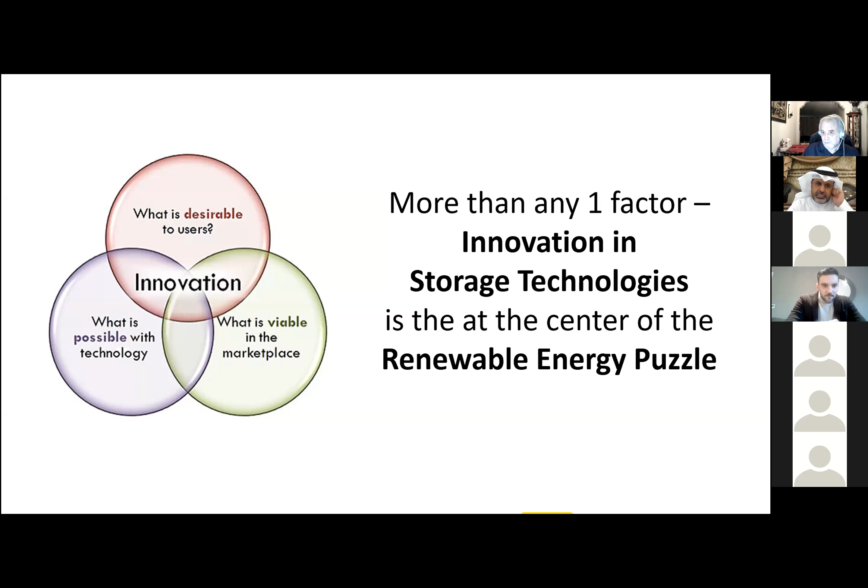First, in innovation, more than any other factor, innovation in storage technology is at the center of the renewable energy puzzle. Innovation is about what is desirable, what is possible, and what is viable. And that is the Venn diagram for innovation.

Creating energy in the renewable energy field is already a reality. Creating the amounts needed in most places with most technologies is already accepted. But holding on to that power using realistic technologies until it is actually needed is the major problem where innovation is needed today.

There are 5 basic conventional energy storage technologies. Just to quickly review: electrochemical, which includes all types of batteries; electromechanical, which includes flywheels, pumped hydro, compressed air; chemical, electrical, and thermal.

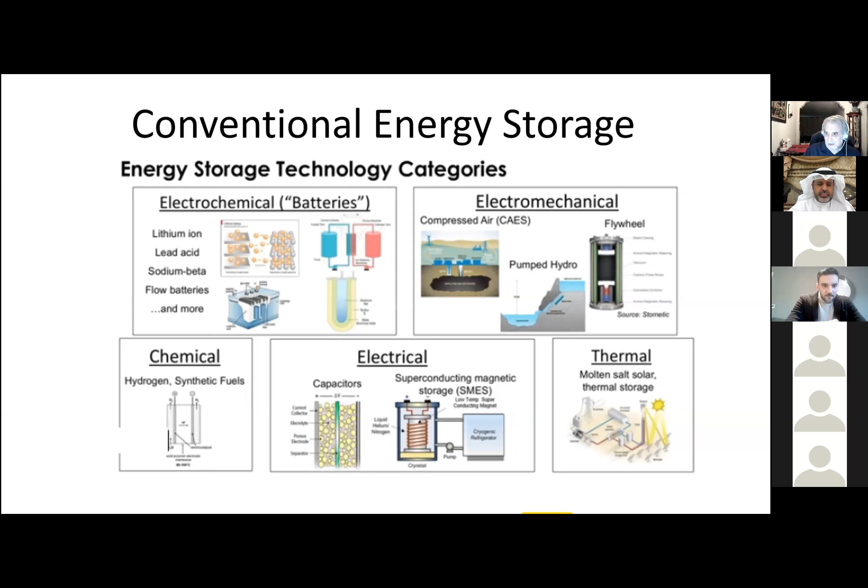What we have in the way of concerns for all of these are the price, the cost of installing it, the maintenance involved, the production of the actual equipment, the energy output and what you can actually store, the capacity, the life cycle of the equipment, how much it's going to take to replace it in what sort of regular time frame, where you locate the equipment, and the environmental impact.

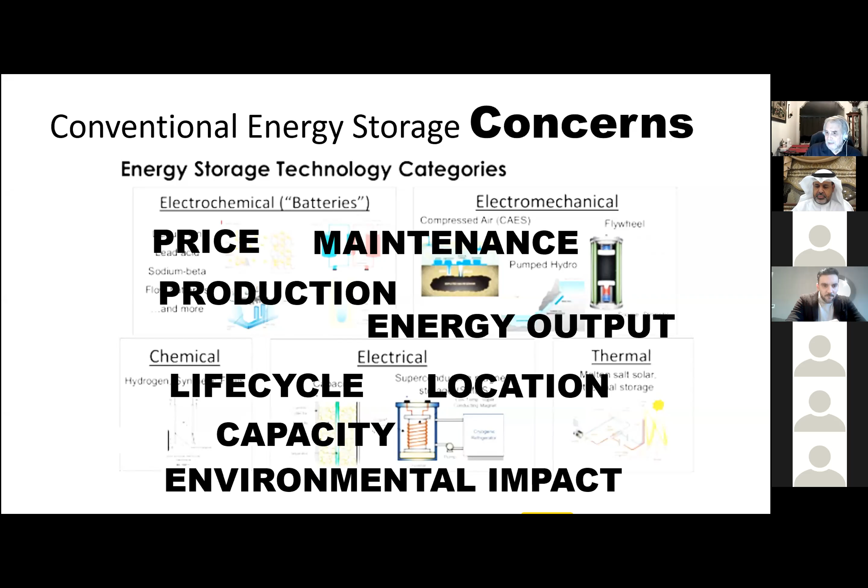Even with serious shortcomings, there are many accepted energy storage systems active in the marketplace today.

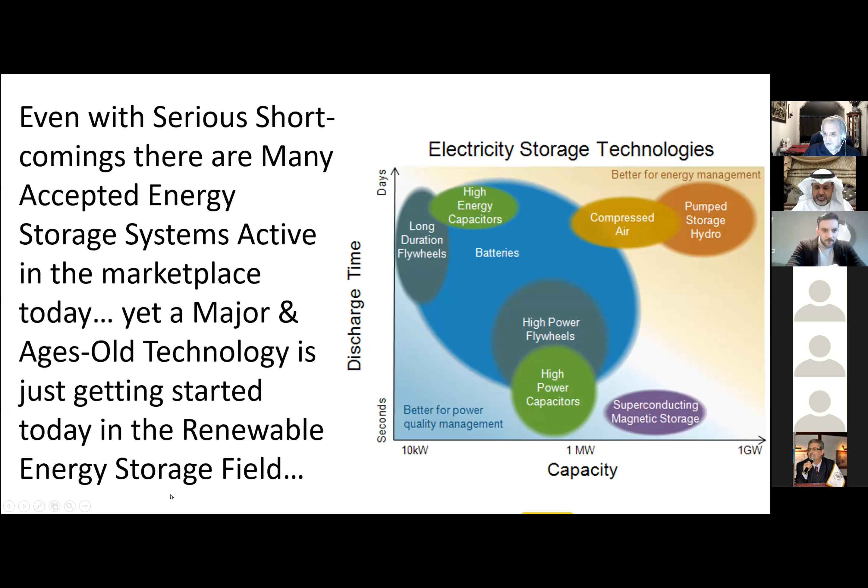Yes, thank you. There are many active in the marketplace today, yet a major age-old technology is just getting started in the renewable energy field. That old school storage technology is weight and gravity-based systems called KESS.

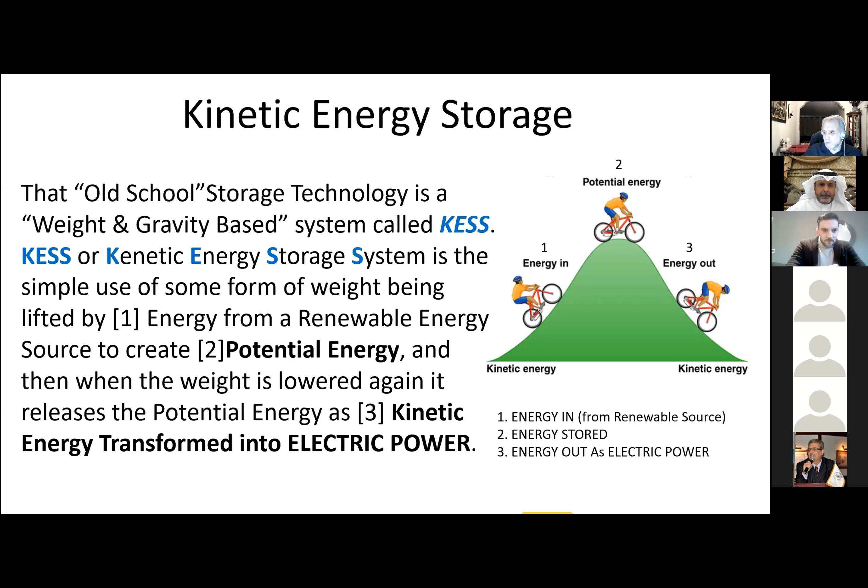KESS, or kinetic energy storage system, is the simple use of some sort of weight being lifted, as shown in number 1, the bike riding up the hill, energy from a renewable energy source creating the energy to get it up there. Second, potential energy, storing that at a height, and then when the weight is lowered again, as in rolling down the hill, it releases potential energy as kinetic energy, transformed into electric power.

All hydroelectric dams are a form of kinetic energy storage and release system. Pumped hydro is the most common use of kinetic energy storage and release. Renewable energy is used to pump water up from the lower reservoir to the upper reservoir, and this is usually done at a time of day when you have the best price to get that power to use it to pump up. The flow downward creates the electric power.

Systems like this use 85 to 95% of the power to recycle itself. So you get a 5 to 15% net power storage to power generation efficiency. And this is very common.

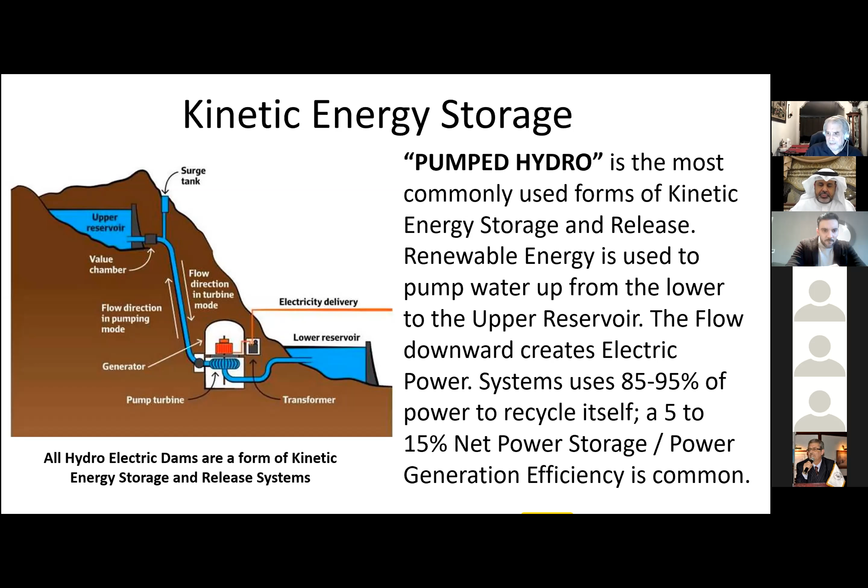Well, what has been known for many years and used in many things outside of renewable energy is that you can use a motor to lift a weight by electric power. That's number one here. The electric power is going in, and that creates potential energy in the weight by lifting it up. The weight stores that energy as long as it's held, which is shown in number 2.

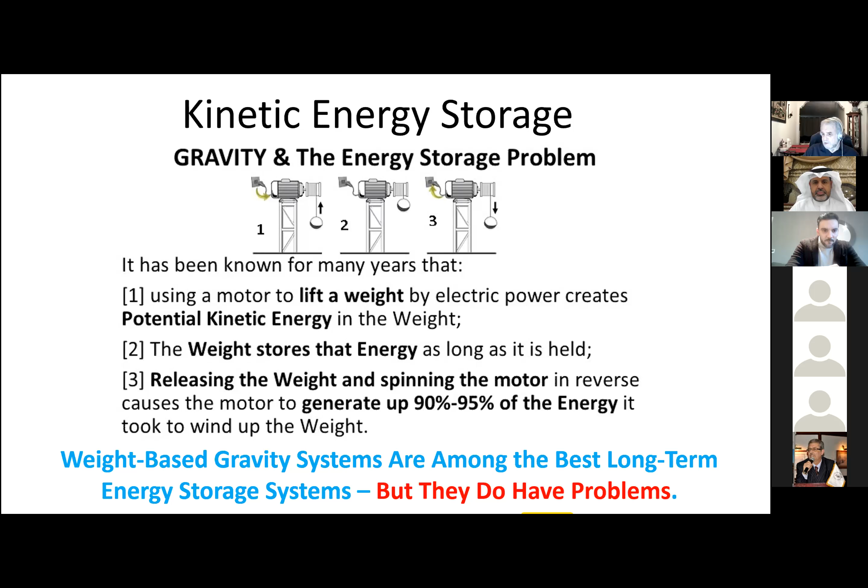And then in number 3, releasing the weight and spinning the motor in reverse causes the motor to become a generator, to generate up to 90 to 95% of the energy it took to wind up the weight. This is very efficient. Weight-based gravity systems are among the best long-term energy storage systems, but like everything, they do have problems.

What I want to talk about here to begin with are 4 new technologies that are coming to the marketplace for gravity weight-based renewable energy storage systems. These 4 technologies are not quite on the market yet, but have been approved for funding and have been in negotiations for large-scale purchases, but very few comments have come out about the downsides of these technologies.

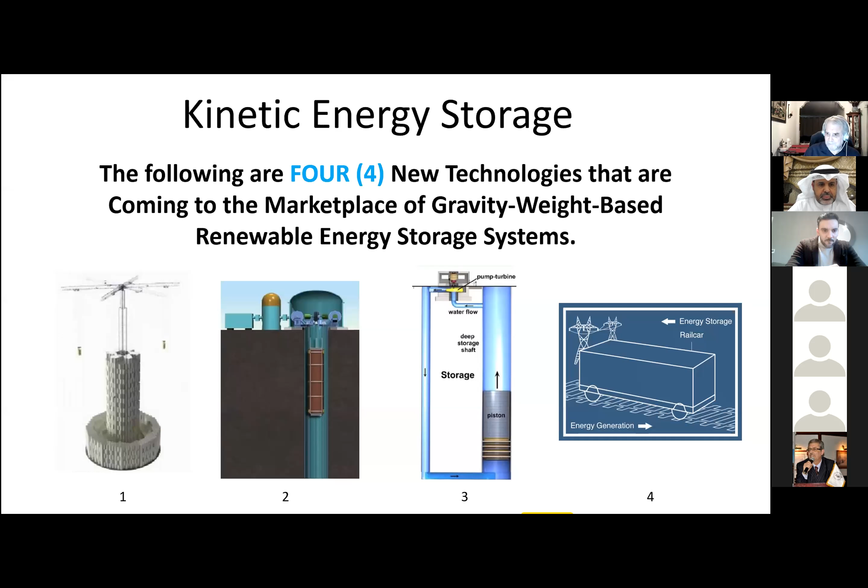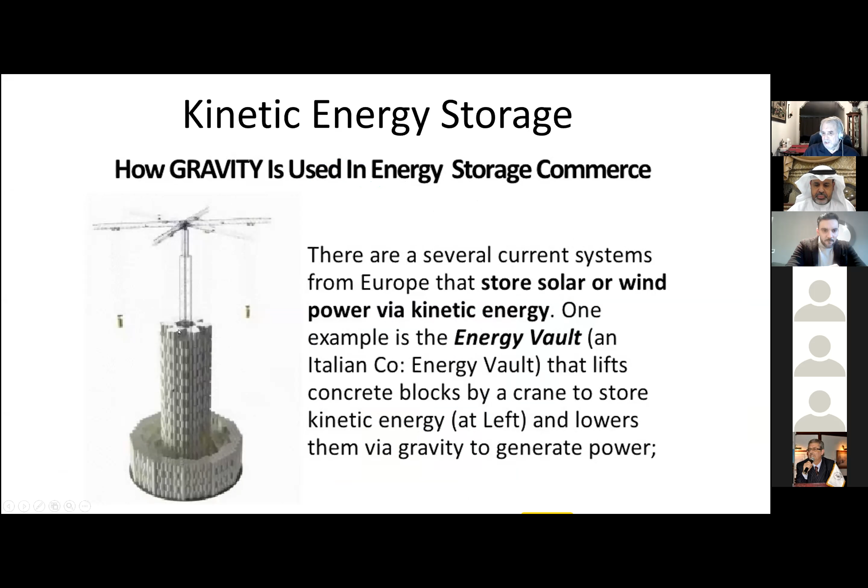First, let's talk about the energy vault. This is one of several to come out of Europe, and this one is very simple in that it uses cranes. As you can see, there are 6 cranes here to lift up concrete blocks to store the kinetic energy in these blocks as they're stacked up around the crane. Here's the system with 4 cranes, and actually you've got a 5th one on top. Minimal charge, half of the charge is up, 3/4, and full storage.

Let's go back a second. This actually is a system that has good potential. You can output power as other power is stored in, and you can store power for long periods of time.

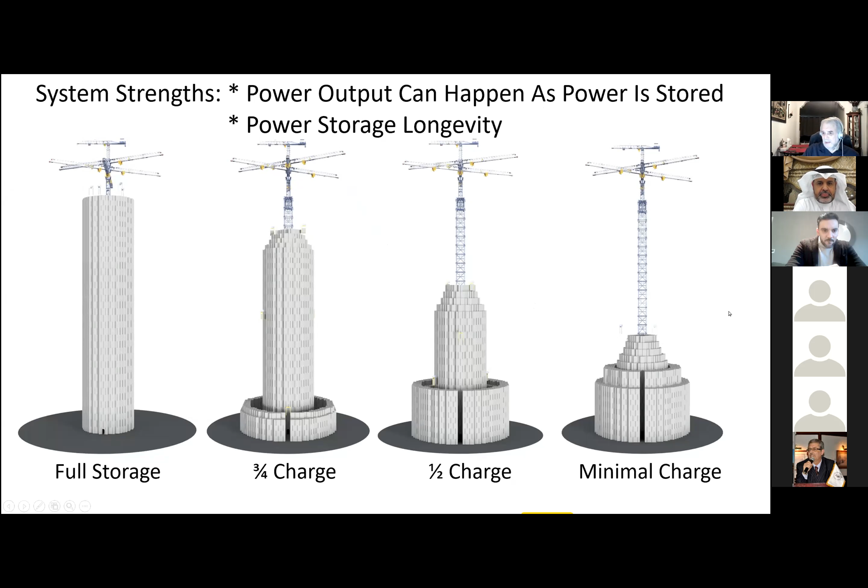But this storage system has problems. Possible collapse from misalignment of the blocks. High winds can affect the swing of the cables during power generation or movement of the blocks to or from storage. Earthquakes or earth shifts can topple the structure. The number of crane arms limits the power production or storage at any given time, as well as the actual weight of each concrete block. You need to have a massive weight in one location, and you'd have to have either a major foundation built or an area where you place this on a bedrock base. And my favorite, it's a massive eyesore on any landscape. This would have to be much, much larger than a wind farm, and it would be something that people really wouldn't be happy to look at long term.

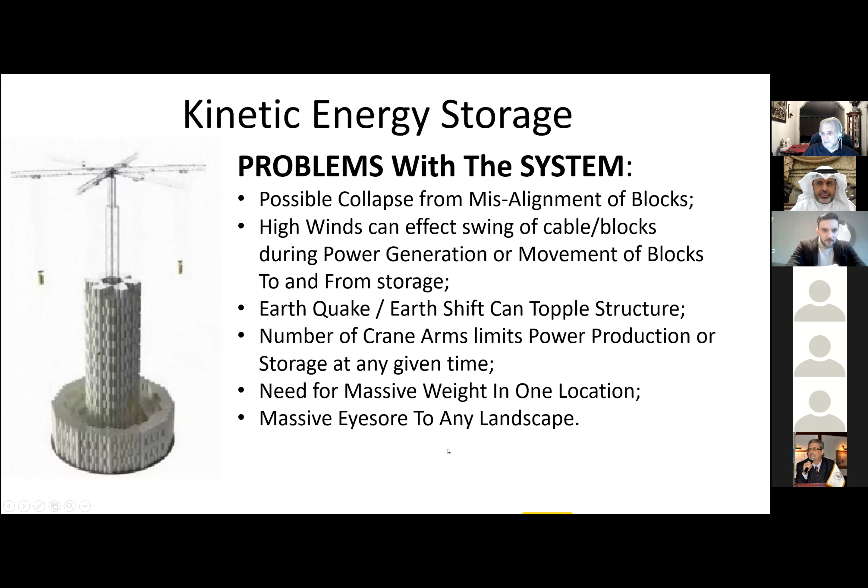The second energy system is called gravitricity, and this is a Swiss company. What they've done is dig a very deep hole, and in that hole they put a weight, connected on 4 sides with cables to combination motor generators. When the weight is at the bottom of the hole, they use power from renewable energy to pull it up and place it at the top, storing the kinetic energy in the weight. When they want power back, they release the weight slowly, turning these 4 generators, the pulleys, as generators, producing electric power and outputting it to the grid as needed.

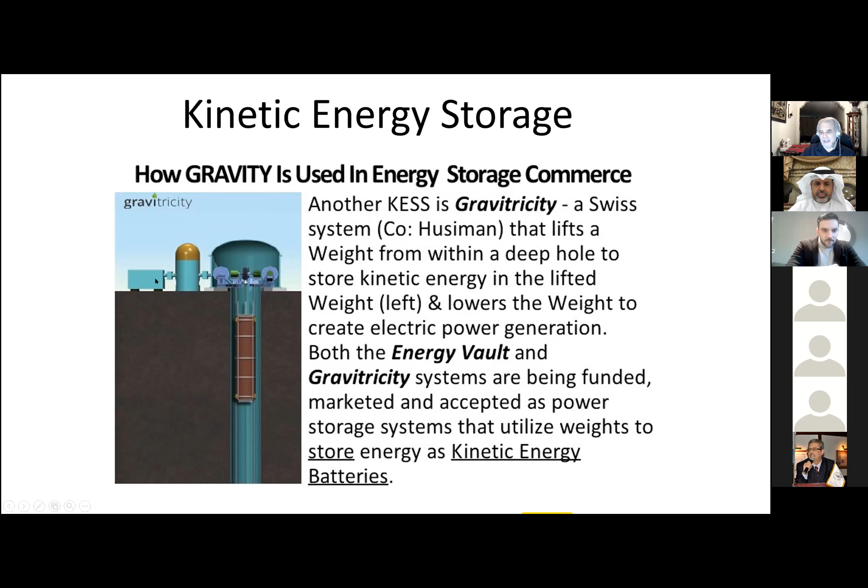All of this is pretty good, but there are problems with this system. Earthquakes and ground shifts, again, can totally destroy this system very quickly. Multiple cable sets and generator motors mean that the failure of one is the failure of the entire system. There's no power in and power out simultaneous capability—you either put power in or take power out. You have limited static output per system, although they can be linked together. And if one of the cable sets snaps or snags, you're going to get a weight shift and possible tilting and jamming of the weight in the shaft. The stability of this long tube, which they say could be hundreds of meters deep, is in jeopardy.

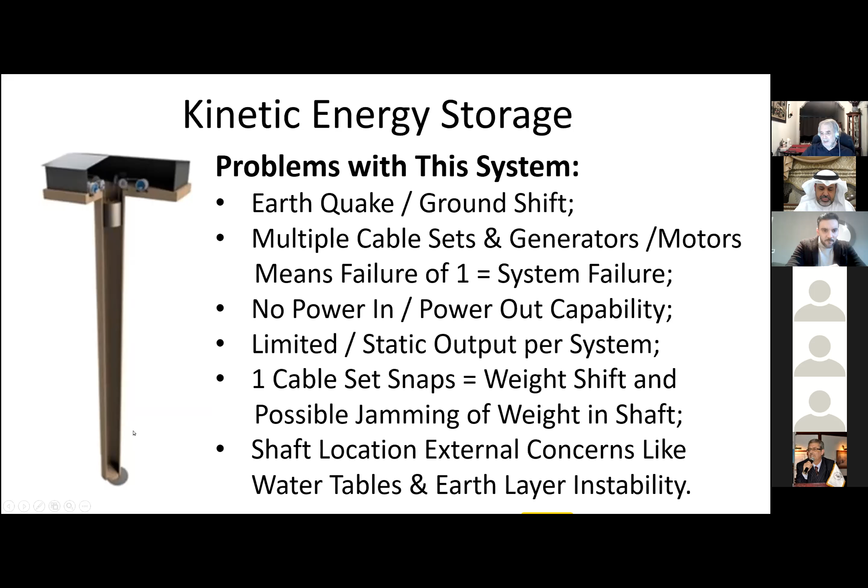A third kinetic energy storage system is called gravity power. It utilizes what's basically a captive pump hydro type system. In operation, a single large piston, shown here on the right, is pushed upwards in a tube via a motorized turbine that uses pressurized water placed under the piston. Let me go to the next one. Here, it pumps water from the top down under the piston, pushing the piston up.

When the piston is at its maximum or any point in between, they can reverse the flow. The piston goes down and the water is pumped up through the turbine, spinning the generator, creating electricity.

They're only estimating a 75 to 80% efficiency in this. They say it's a low-cost system, but I have my doubts about that. No emissions is true, as are the other systems. No continued water use—we'll talk about that in a second. And it should have excellent dynamic response, but it hasn't been tried out yet. They're still working on the prototype.

As you can see by the size of the people here, this is quite a large endeavor. Digging this hole, making the shaft, whether that's a steel or concrete inner liner, it's going to be a long process to get this done. And it only has the operating capability of a very specific amount of power at any one time.

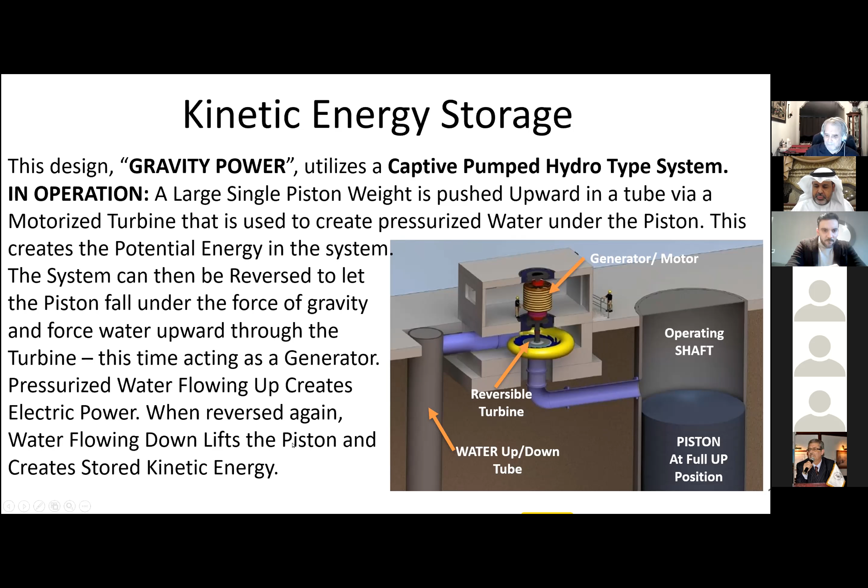Now, the problems with this system: you must use clean water, or the system will jam up or require major and constant maintenance. You cannot put seawater in here because the salt will be corrosive. The organisms that come in with the seawater will populate inside of here and cause it to jam up.

You have the evaporation problem. If we're talking about installing these in the Middle East, you're going to have major evaporation problems as the land around this is going to be very warm. You have earthquake or earth shift damage that could stop the piston movement as well as causing leakage.

There's no power in, power out simultaneous capability—it either works one way or the other. And large quantities of water are needed, being millions of liters per location, and being clean, almost drinkable water. This might be a problem for areas of the world where water is a major concern.

The last of the four kinetic energy storage systems that are coming on the market right now—excuse me, I need to drink water.

The last of the four is the rail energy storage. I have concerns about this right from the beginning, but basically you use your energy from your wind farm to run motors inside of these boxcars filled with gravel or rocks and push them up a track. You can push one, or many, up a track where they stay at the top of a hill.

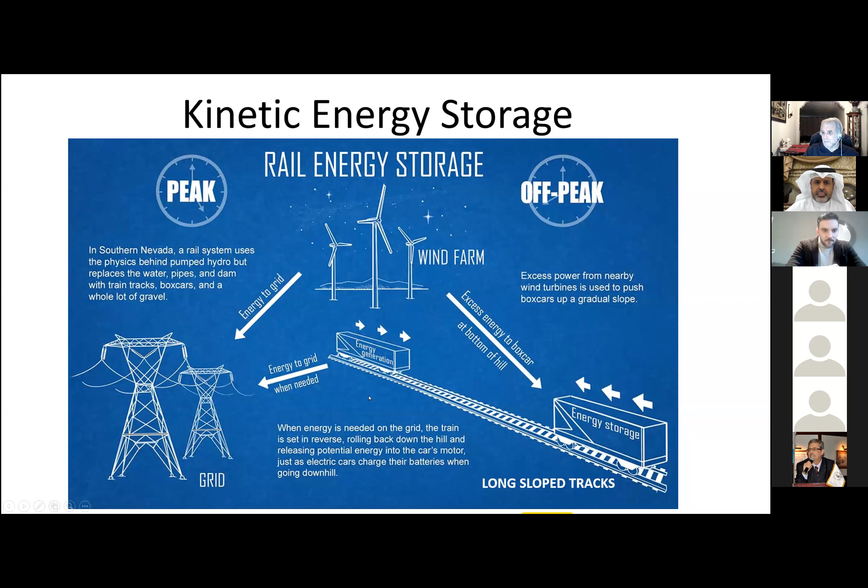Now, CyberKnight, my company, has developed something called the Power Bank System, PBS, a renewable storage energy technology that I'd like to tell you about.

This is still in the patent intellectual property stage, but it can deliver scalable power on demand in the amount required. In other words, if there's a load on the system that is a couple of hundred watts, 1,000 watts, or a megawatt, the system can output exactly that much power. Small amounts of power or large amounts of power, the system responds to the demand and outputs that exact amount of power, so there's no power wasted.

It accepts power in as it delivers power out, so it has simultaneous in and out capability. Because of that, it also accepts electric, gaseous pressure, or rotational power in, and stores that energy in a unique format to be delivered as electrical power out. So whether you have a windmill directly connected to this creating electric power that's put into it, or something creating pressure—whether it's any type of gas—it can be accepted into this system, and the power can then be converted to a storable format where it is available on demand to be output.

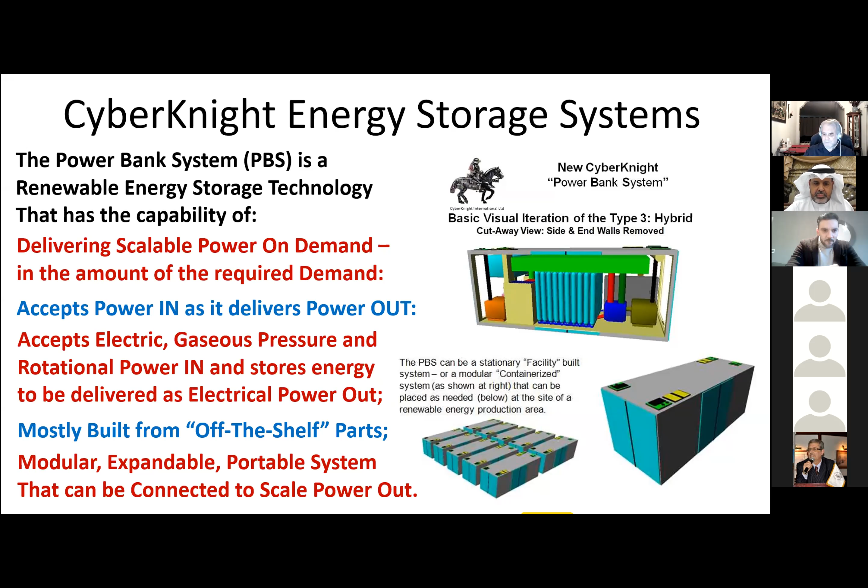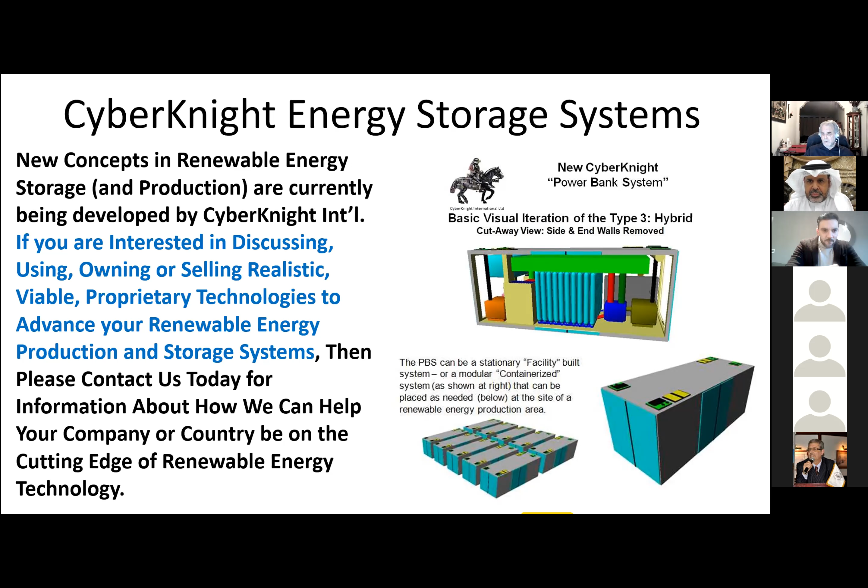So these are CyberKnight's new renewable energy storage and production concepts that we currently have in design and production. If you're interested in discussing using, owning, or selling realistic, viable proprietary technologies to advance your renewable energy production and storage systems, please contact us about how we might be able to help you or your country be on the cutting edge of renewable energy technology.

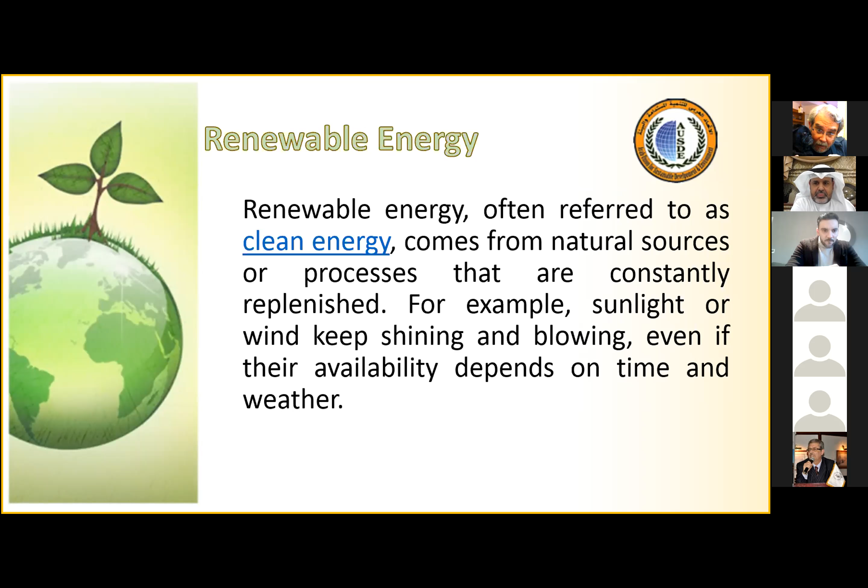All right, if I move to the second point, why we want renewable energy: of course, environmental benefits. The thing is that, as we are all hearing and talking about the CCE or the circular carbon economy, we are injecting the environment with a lot of emissions. And that affects the environment badly, and that's going to get back to us in a way or another, sooner or later. So we need to work on that. And of course, once we control it, that's indirectly getting better in terms of efficiency.

And one more thing is that we want the system and the grid to be sustainable. This is really important. We want a sustainable system, not just in the grid, but overall. And that can be achieved by relying on renewable energy as one very strong variable in the formula or in the equation. Another thing is that, of course, we are going to improve the economy by many things, such as securing jobs. We would love to create jobs, and that comes with new technology.

It's not just with renewable energy, but with new technologies. The beautiful thing about renewable energy is that there is still a lot of room for improvement. That means we are talking about a lot of new technologies that come in the future. But the thing is that we need to move on toward innovation. And there's a difference between innovation and invention, by the way. So if I have a chance to give the difference, I will do so for sure.

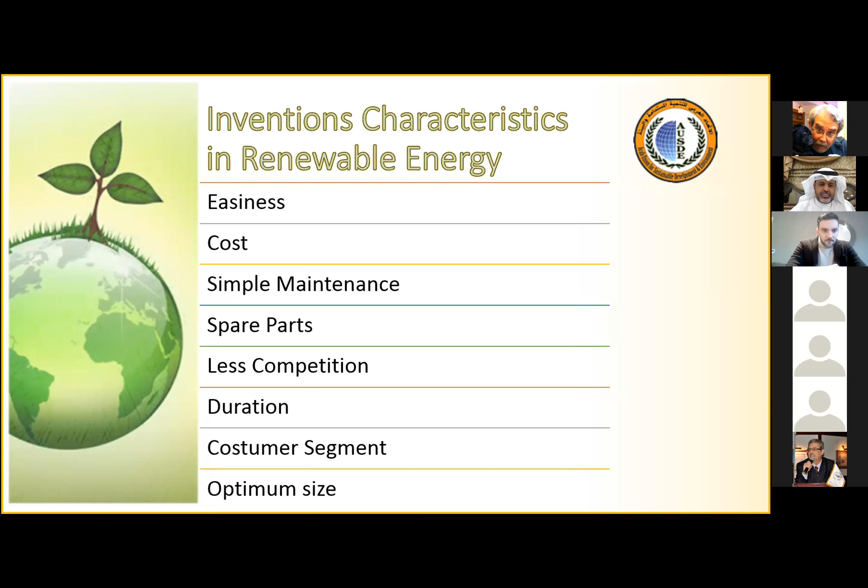I've talked about the customer segment. It's good to have a very great number of customers in the segment that I'm going to sell my product to. So we need to put this into our considerations as well. And we need to design the system in the optimum size. I don't want to say the smallest or the largest. It depends on the optimum size that fits this idea. Again, since I talked about the optimum size, we need to focus on the optimum weight as well.

Easy manufacturing. Yes, we don't want to have something really complicated that is going to cost a lot in order to localize the manufacturing process. And sometimes it might be impossible to manufacture in third world countries or developing countries. And in this case, we're going to have to manufacture it in another country, such as China or something like that. We would love to have our manufacturers in our country. That's going to be beneficial in terms of jobs, politics, and so on.

If we talk about license and permissions, that's something really important. I will give you an example with the biomedical devices. There's no way that you can sell them without having a permission from the FDA, Food and Drug Administration. So in Saudi Arabia, we have the Saudi FDA, and we cannot sell any equipment until it goes through the phases that have been defined by the Saudi FDA. And usually it doesn't take a year or two. It takes a longer time to get the permission to sell the product in Saudi Arabia.

Ethical, we want to have an idea that is ethical. We don't want to go beyond that, of course. Sometimes when we have a good idea, we don't recognize any side effects or side issues or other problems that could potentially be generated by this idea. So we need to make sure that the side problems are fewer.

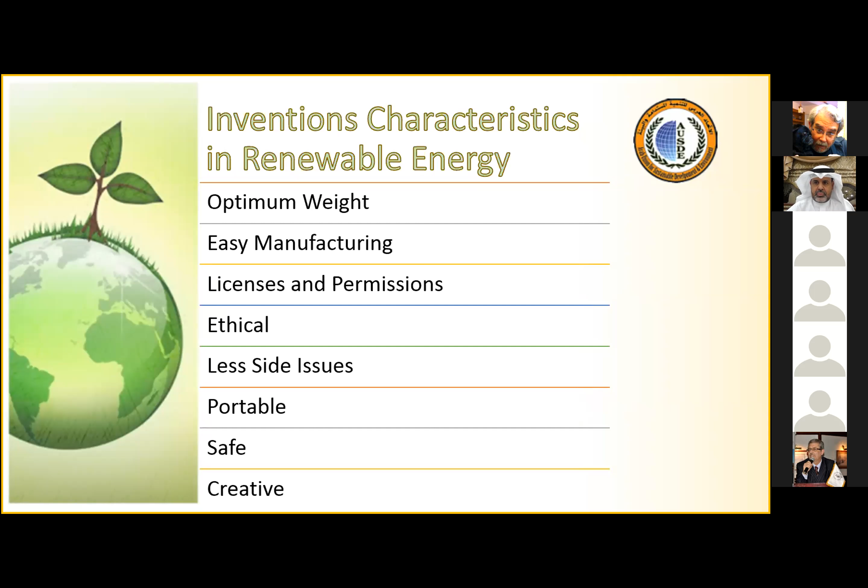I would love to talk about some of the issues related to PV panels. Again, I'm trying to pinpoint the major issues and challenges involved with the PV panels. That's not going to be everything for sure, but we have a problem related to delamination and internal corrosion. Here's the thing that we need to know about PVs. Air and moisture are not supposed to get inside. Otherwise, that would cause corrosion inside. And if corrosion happens, that means a very major degradation will happen to the panel, and the efficiency is going to go down for sure. And maybe this panel is going to be a deficit, and there's no use of this panel at all.

Electrical issues that are related to wires and connections or connectors. So far, we are using MC4. Before that, there was MC3. And I don't know, maybe we're going to have MC5 or something like that. But with the connectors, for example, there was a problem with MC3 that it might generate an arc flash inside the connectors. That's why they came up with the clickable MC4, and still it's not the perfect one. Maybe you can come up with a solution for that.

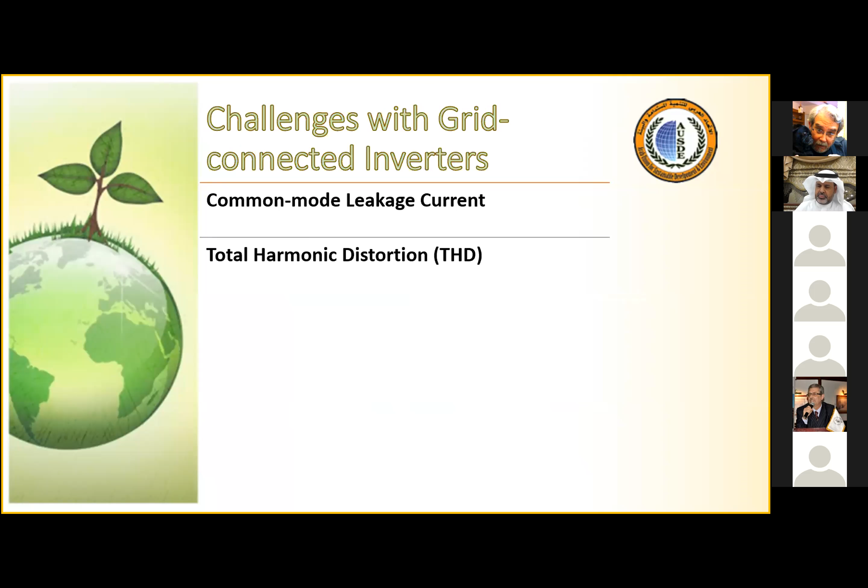Efficiency: when we talk about efficiency, the problem is that we don't have 100% efficiency. That means the power that gets in is not the power that gets out. We have losses there, and those losses usually get higher, especially when we oversize the inverter, or the power produced by the PVs is way less than the rating of the inverter.

This is another problem. And one more thing is that power electronics devices have to be in very good topologies, so that we don't have any high stress on the power electronics devices. Usually we use the term dV/dt and di/dt. We don't want to change between on and off in a way that the difference in the potential is very high. That causes stress in the power electronics and then huge degradation. That's why we need really good design for power electronics topologies, the new inverters, to get around this

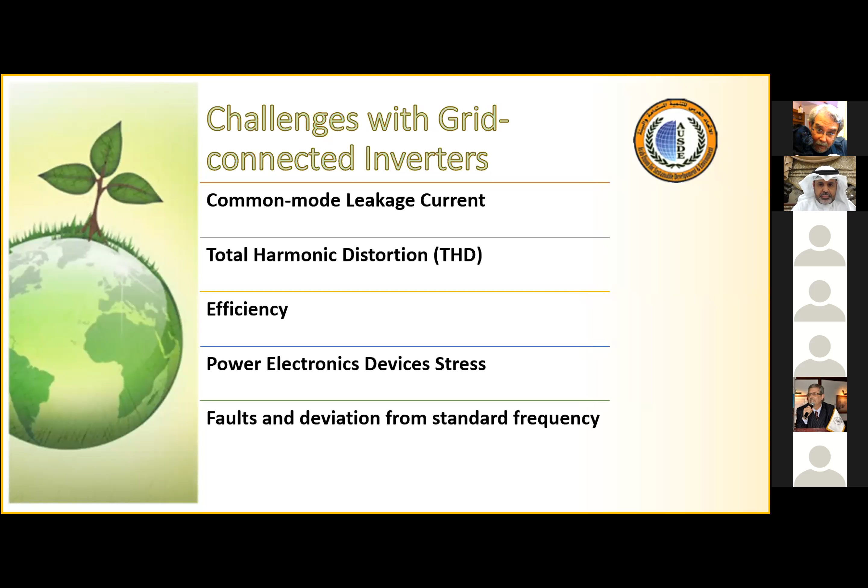problem. And at last we have faults, and deviation from standard frequency is another problem that might be caused by poor design and bad topologies for the inverters. It's one of the issues and challenges that we need to get around. There's one more thing, which is active and reactive power control. Is it going to be bidirectional or one direction? That's really important, because sometimes with some regulations we need to inject the grid with reactive power, especially with grids that are claimed as weak systems.

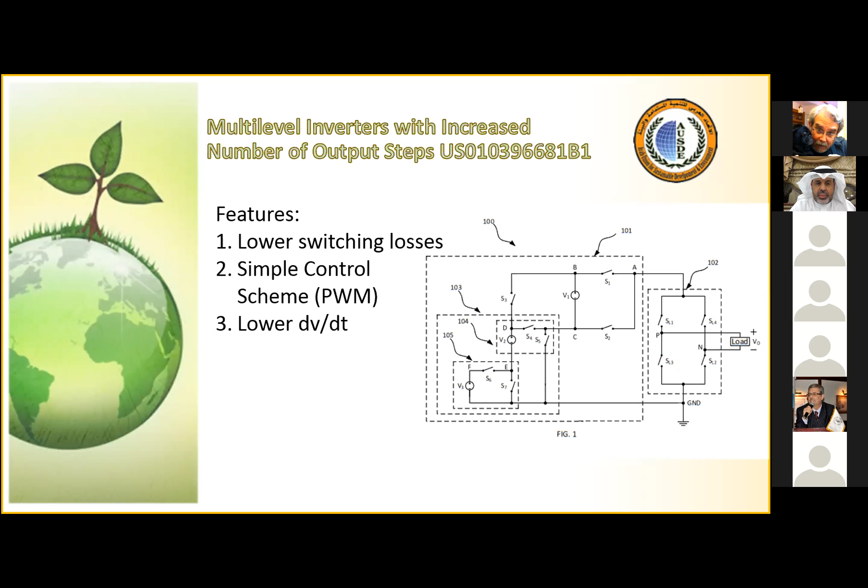This is another patent that I have, which is a multi-level inverter. I came up with this topology and it has been patented. I think I already have a paper for this one, but what I accomplished with this topology is that it has lower switching losses. I use a very simple technique for controlling this topology, which is the very well-known pulse width modulation. It is way easier than the other controlling techniques, and the stress is very low. I made it really low, the dv/dt that goes across the switching devices, and of course I mitigated the harmonics as well.

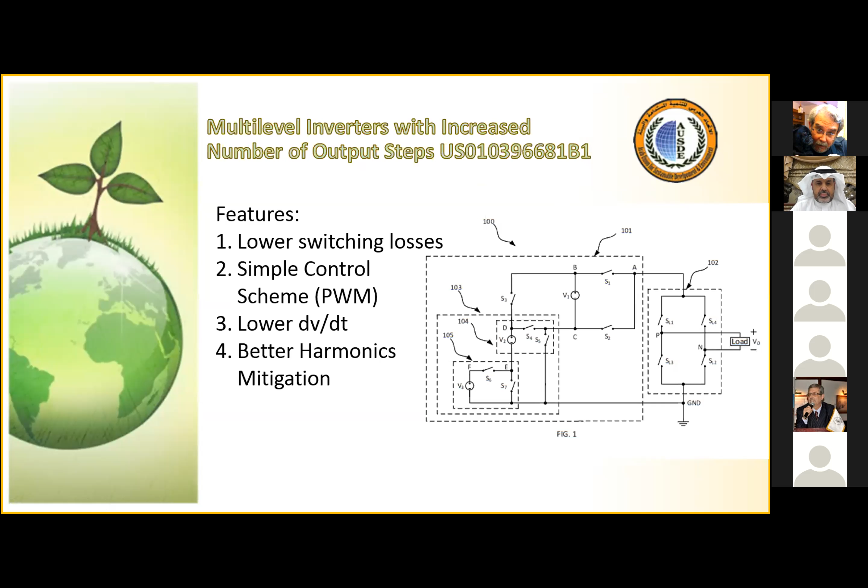So guys, if you want to read about this patent, please refer to this one. I'm pretty sure you will find the other multi-level inverters. They are very close to each other. I have different topologies, but for the sake of time, I just put this one, and most of them have similar features, except there are some changes and differences in the topologies. So briefly speaking, these are the four main features I have with this topology.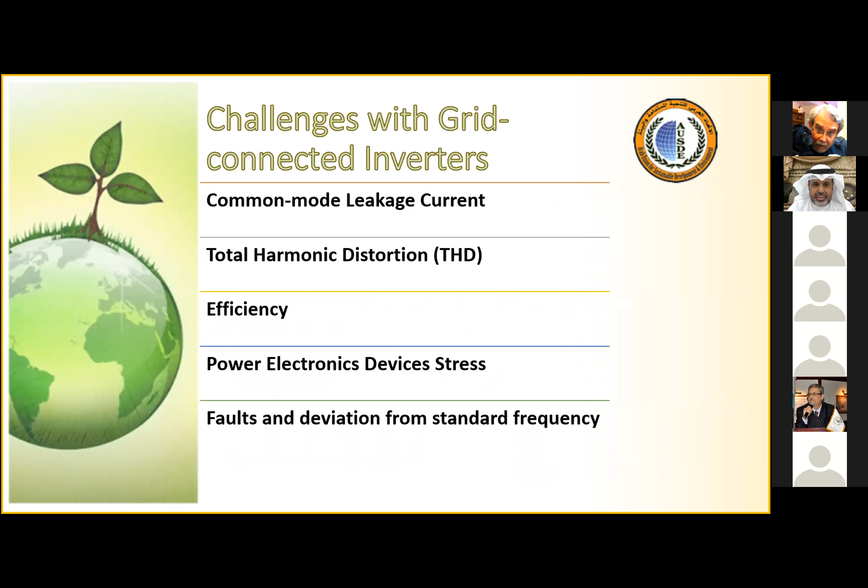All right. Let me show you here. This is for September only, but the thing is that with this idea I'm relying on mirrors, where the idea is the panels are getting the light from the sun directly and reflected from the mirrors. Here's one thing we need to know about panels: usually panels get the most out of the photons they receive when the sun is perpendicular over the panels. So what I did here is put mirrors to have the light perpendicular over the panels, and during noontime there's no reflection, so it acts exactly like the other technologies. But before that, we have the regular beam and another beam. So we call it two sun, where each sun is about 1,000 watts per meter square.

So that's why we are having two suns. This idea is making the regular panel work a bit more like concentrated cells. If you're familiar with the concentrated cell, not the thermal one, but the one that can focus light in the center, that's why we have this one in the middle, where the mirror doesn't reflect the light at all.

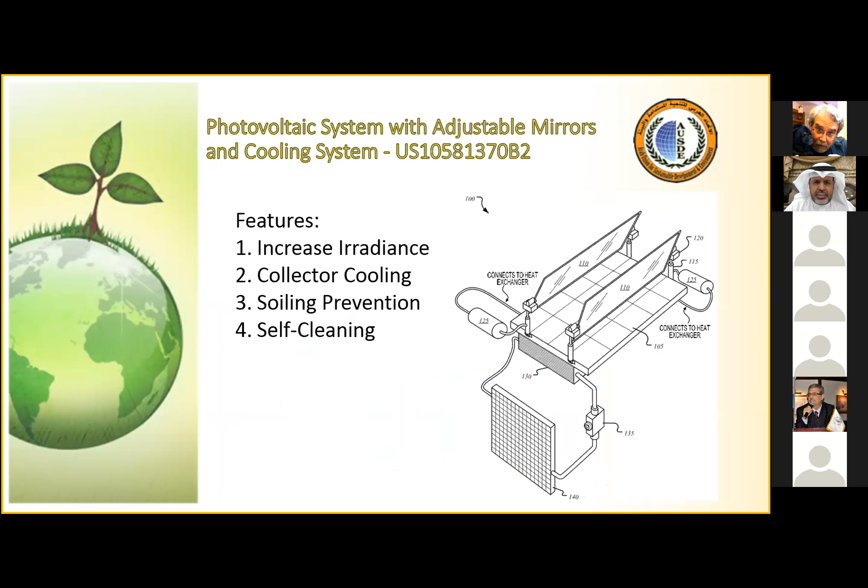Is that right? That is correct. The idea of the mirror is almost there. I didn't bring in anything new about the mirror, it's there already. But I'm having this radiator system where I get the benefit of using the actuator to cool down the fluid inside, to cool down the panels. Those actuators are also used to control the angle of the mirrors, which produces more power. That's where my patent is concentrated.

It's in the actuators here, using the mirrors. But your idea, Doctor, is correct. Doctor, your patent is brilliant. It is. Thank you, Mr. Robert. Yes, I love it, I love it, it's a great idea.

I think one concern about the PV panels is that the concentration of photons should be equally distributed across the whole panel. Are the mirrors doing that? Because I feel the concentration might be increased in one cell, differently from the other cells. But I think you've tested it. I'm just curious about the results. Do you have equal concentration of photons with this technique?

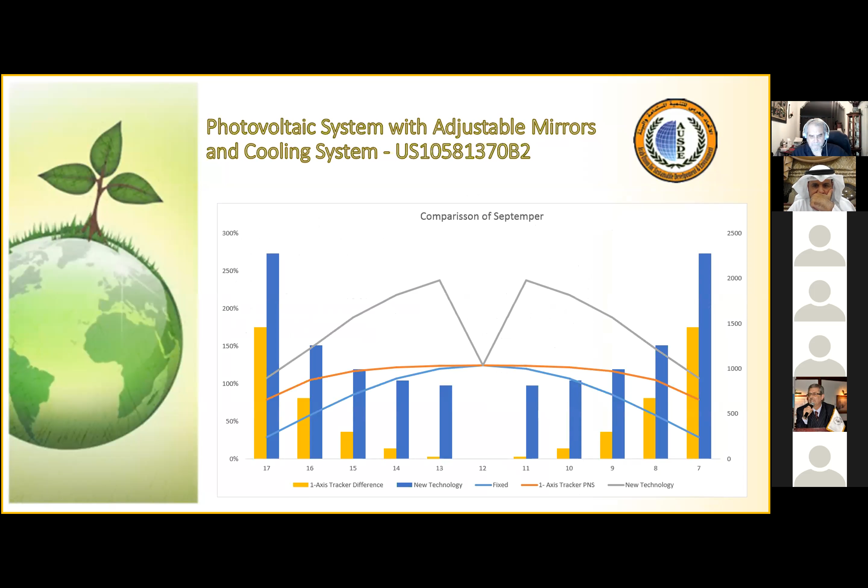One more thing I put into consideration is the shade caused by, for example, the first mirror. Most likely you'll see this in the first paper I'll publish, and then the second paper which will come out after 4 or 5 months. So I put into consideration the shades caused by the mirror, whether the sun comes from the east or goes all the way to the west.

There's one beautiful thing I expected a question about this patent: number 3 and 4, how this idea can prevent any soiling. With this idea, what I did is put sensors in case there's an alarm of a dusty wind. Then these two mirrors are going to cover the panels, going flat, attached to the PVs in a way.

This figure is not perfect, by the way, ladies and gentlemen. So it's going to cover the panels, so when that wind goes away, at least we've saved the panels a little bit from accumulating any dust over it.

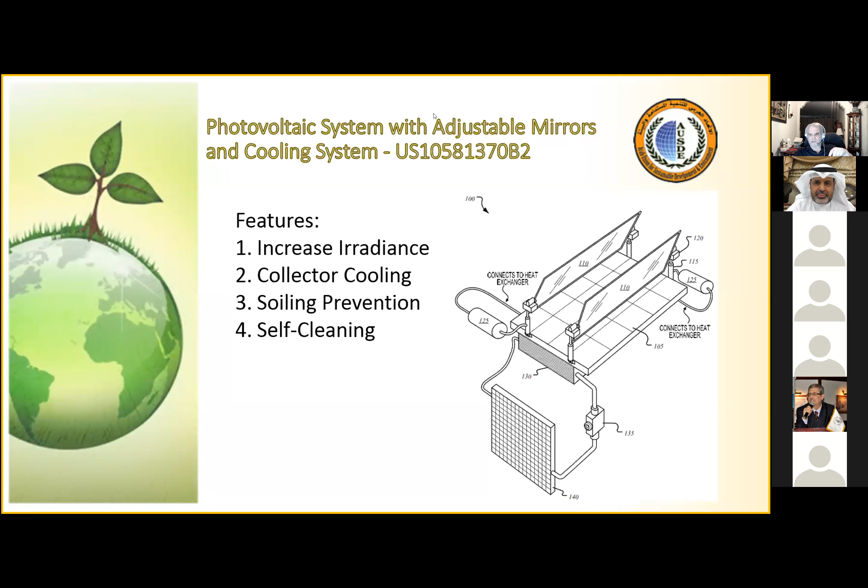All right, as I can see here, PID is... when we talk about this, one of the questions I got from Ahmad Ibrahim is, he's asking what does PID mean? What does it mean?

It means there's a potential difference between the panels and the ground, and that causes leakage from the panel right to the ground. So instead of that panel sending power over the wires to our houses and the load, there's leakage that happens right behind the panels. There's one project I'm working on, or will be working on shortly, inshallah. I'm arranging that.